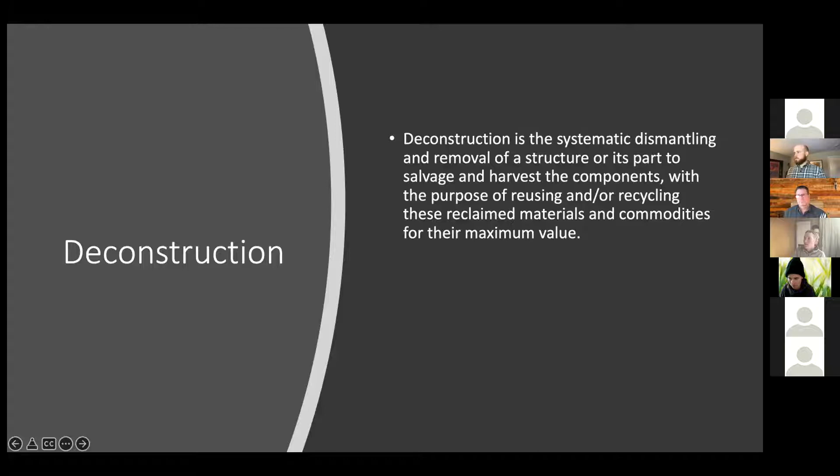Some building industry stats that I think are helpful to share: 50% of material resources taken from nature are building related. 40% of carbon dioxide emissions in the world are building related, and building stock is anticipated to double by 2060.

There are, of course, a lot of solutions being posed to help us build better, such as certifications like LEED or the Living Building Challenge. There's also the idea of designing for deconstruction, so that at the end of a building's life it can easily be taken apart and the materials salvaged for reuse. That involves things like not using as much glue everywhere. There's also talk around reduce and recycle, more specifically around decreasing waste at its source and increasing the lifespan of consumables, and a growing awareness around deconstruction.

There are different levels of deconstruction. There's selective deconstruction, where you cherry pick certain items to be salvaged in the house. It can be structural or non-structural. There's also partially mechanized, panelized, hybrid deconstruction.

This is a picture at one of our job sites where we salvaged over 45 trusses using a telescopic forklift. There's also panelized deconstruction, where you take off an entire wall or section of a building and disassemble it right there, or haul it to a warehouse and disassemble it there. If you're familiar with modular building, it's essentially the opposite of that.

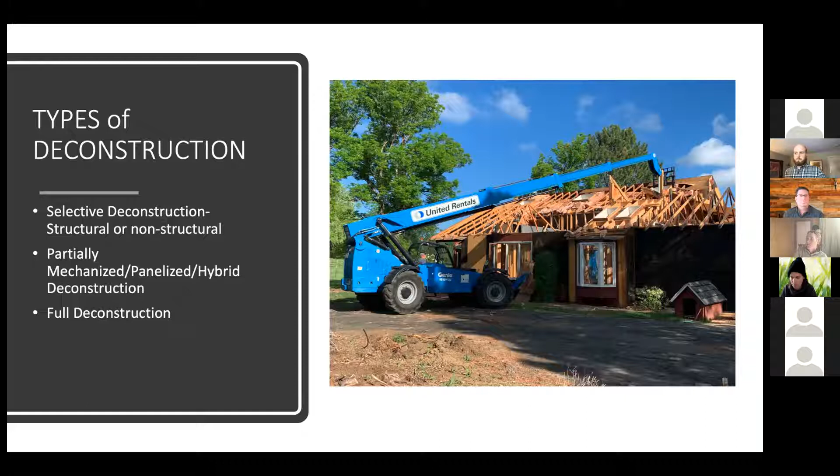Starting the deconstruction process, we always start with a job site walk. I'll walk the job with the contractor or homeowner, and at that point I'm understanding the scope of the job, what's going to get removed, and I'm taking a lot of pictures and creating a waste plan. Based on that waste plan, I'm able to figure out how much it's going to cost us to do the work. I send the bid to the contractor, and then we're hired to do the work.

What we do is more surgical and more careful than bulldozing or using a sledgehammer, so sometimes it can increase the cost of the service, not in every case, but sometimes. To help offset that additional cost, we donate the materials to nonprofits. We help connect the homeowner to an appraisal group so they can claim a charitable tax contribution and receive tax deductions. In this slide, I showed what the waste donation salvage list looks like that Resource Central does, a nonprofit in Boulder.

And they'll do this for free. Anyone in Boulder County, they'll go to your project and create a list of items that they will accept, then give it to the contractor or homeowner. I usually get it, and then our team knows what we can remove and salvage for the nonprofit.

I also, just for fun, included some pictures from a project we completed last week, an interior salvage job, with a lot of insulation, Trex decking, cabinets, etc.

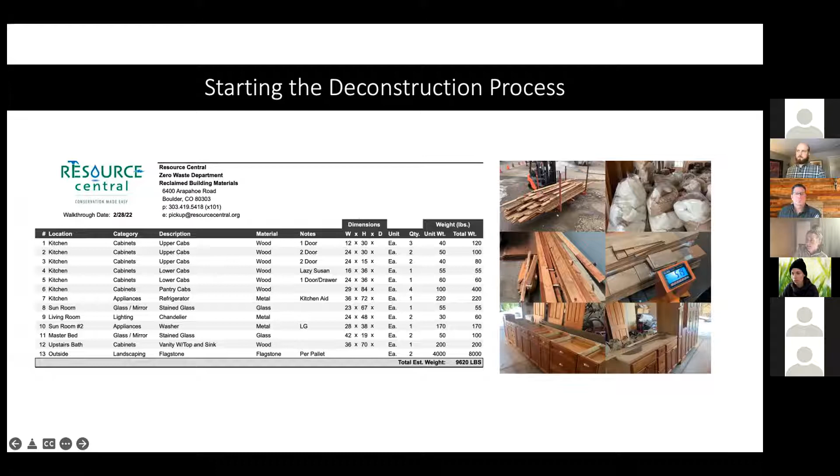So real quickly here, I'll go over a couple projects that we've done in the last year and a half or so to give you an idea of impact.

So this is a house that was built in the 1980s. It was 7,000 square feet. It took us 38 days with a team of 5 to fully disassemble the house. We diverted 125,000 pounds of material from the landfill, and 91,500 pounds of that material was wood. Overall, it was a 52% diversion rate.

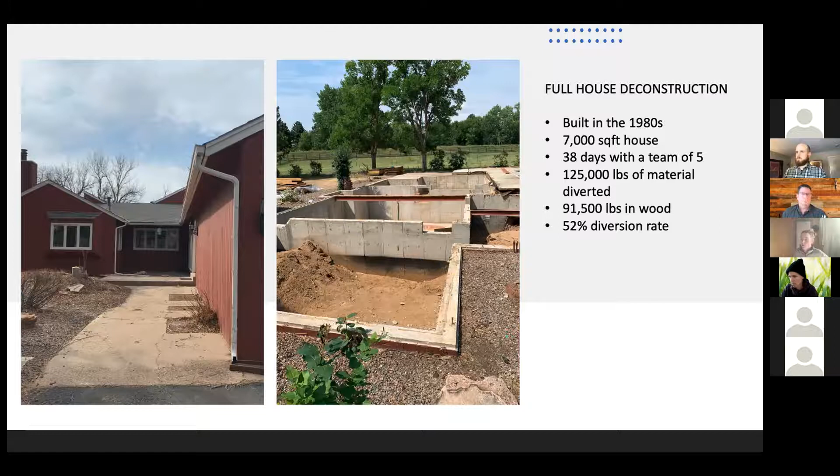We left the foundation. It'll get removed and recycled hopefully this summer, and that will increase the overall diversion rate. The homeowners were really interested in reusing materials on this job site. They were located down in Greenwood Village, so they weren't required to deconstruct, but they were driven by their own sustainable values, and were able to receive a tax deduction.

All the red cedar from their house, they built over 20 garden beds from. We removed a lot of lumber for them, denailed it and processed it, and left about 60% of it for them to reuse.

We also had a lot of insulation, windows, garage doors, structural I-beams, a lot of different material that came out. Because it was from the 1980s, there were some cabinets and vanities that couldn't get accepted by local nonprofits. So the biggest salvage value in this house would have been the lumber.

In the recap, homeowners paid about 3 times more for deconstruction. I estimated, after we took all the linear footage of all the lumber that we denailed and left them, that it was about a $40,000 value in lumber. And then they received tax deductions for this project, around $20,000. So combining those two benefits, they definitely saved some money in the long run.

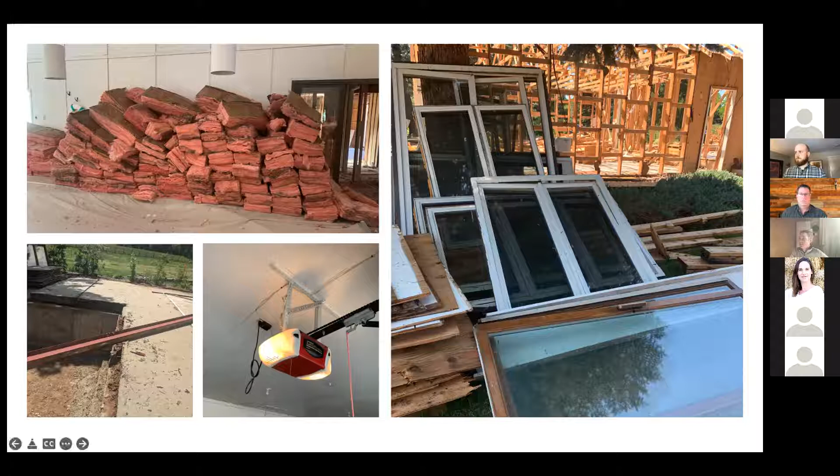Here's another project. Last one was 1980s. This is 1880s. This was in the city of Boulder. We were required to deconstruct it. It was a 2,300 square foot house. It took us 30 days to deconstruct this one.

We diverted 115,000 pounds of material from the landfill. Of that, 18,000 pounds of it was wood. And overall, it was a 78% diversion rate.

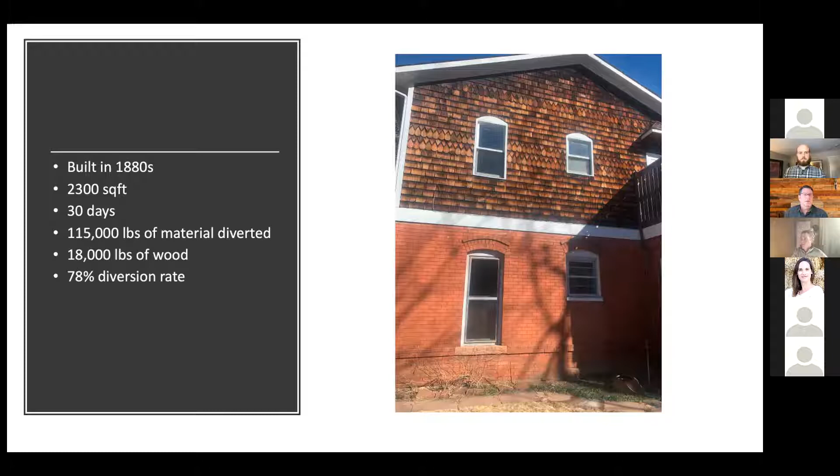We got a lot of great old growth wood from the 1880s out of that one, and bagged up a lot of bad insulation. We also palletized a lot of the brick the homeowners wanted to reuse for their new construction project. The brick they didn't want, we took to have it used as backfill for another project.

Our costs for this project were 4 times more than a traditional demo company. The homeowner will likely get around a $20,000 to $30,000 tax deduction, which makes it about a break-even financial scenario for them. Last one is an interior remodel project.

Unfortunately, there are quite a few homes out there that get remodeled to be sold, and the new homeowner doesn't like any of the new finishes that they just bought for the house. So they ask for it to all be gutted.

So in this case, we were hired to remove doors, cabinetry, demo the bathrooms, remove the flooring. We took about 10 days with a team of 4 people, and all the materials that we donated out of that were appraised at over $100,000, equating to about a $35,000 tax deduction for the homeowner.

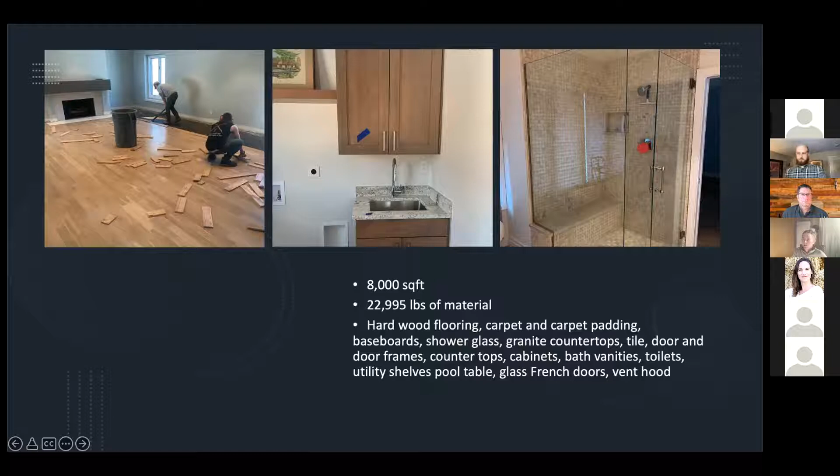And our cost to deconstruct was a lot less, so the homeowner made money in that case. In those 10 days, we saved about 23,000 pounds of material from the landfill. And I'm proud to report, since I started the company, we've diverted over 1 million pounds of material from the landfill.

There's, of course, a lot of challenges of what we do. Unfortunately, there's just not enough end markets for a lot of materials like drywall, asphalt shingles, painted wood, wood with glue. Also, building codes need to allow for reclaimed lumber to be more widely used. It's allowed as long as a structural engineer puts a stamp on it, but structural engineers don't want to take that risk, even though the lumber is much stronger, more resistant to decay.

I'll let Shawn Wood share more about Oregon and Washington and what they've done around creating building codes to allow for reuse. But another challenge is just the industry generally lacks serious investment in reuse culture, from end markets to contractors to consumer behavior. And then there's just a lack of awareness. Most people are genuinely surprised that we can donate and recover the materials that we do.

And we just finished a project yesterday, and the homeowner came home and looked at the flooring that we denailed and saved.

He's like, 'Oh my God, you guys are crazy. I can't believe you can save this stuff.' And that is 95% of the people that we work with. They're just really surprised by the material that we can save.

We have a lot of great nonprofit partners for donation. Bud's Warehouse and Resource Central will actually send out a box truck to collect material from our job sites, and they'll haul it to be donated.

There's also several markets for recycling material. All metals are easy to recycle. Dimensional lumber that's not painted or treated, we can either donate, or we can send it to be chipped up and used as mulch — they'll run a magnet over it and pull the nails out. Any brick or concrete can be sent to the recycler and used as road aggregate.

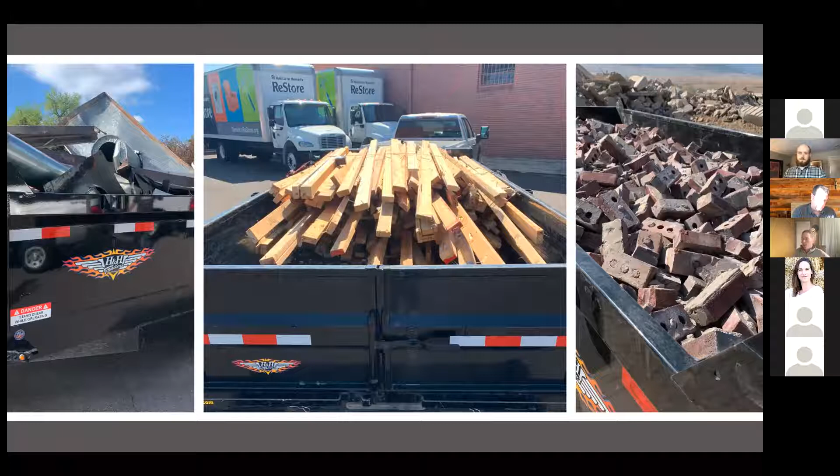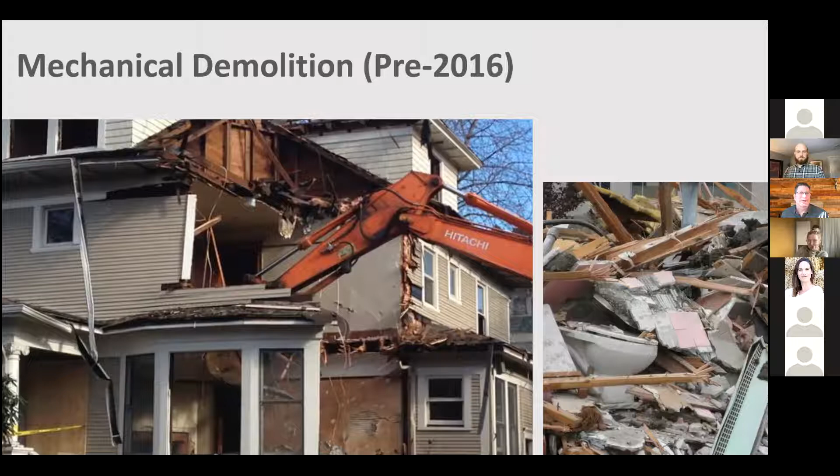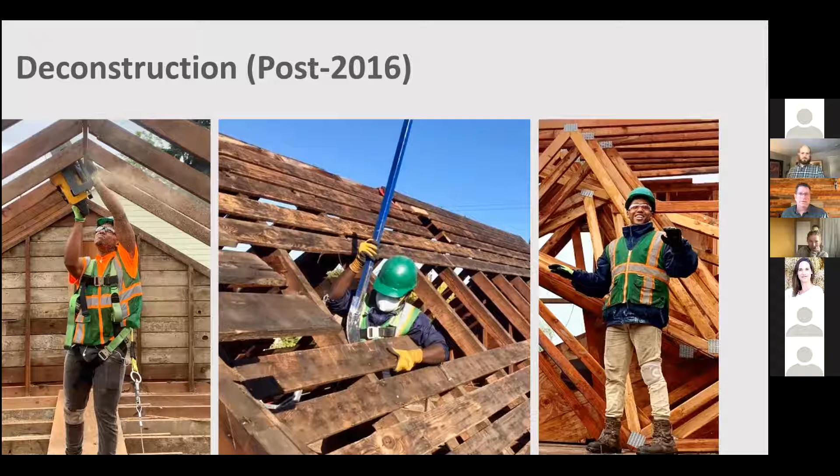I've been using this image in my slideshow for 6 years, so it has turned into kind of the poster child. After 2016, the predominant way for taking down houses in Portland is deconstruction, and I'll explain why in a moment. So we've fundamentally changed how houses come down in Portland, and it really kicked off for us around 2013, 2014.

5+ years ago, you could get a demolition permit over the counter, same day, and that afternoon you could be tearing it down. So a neighbor could literally go to work and come home, and the house next door was gone, and there was a pile of dust everywhere.

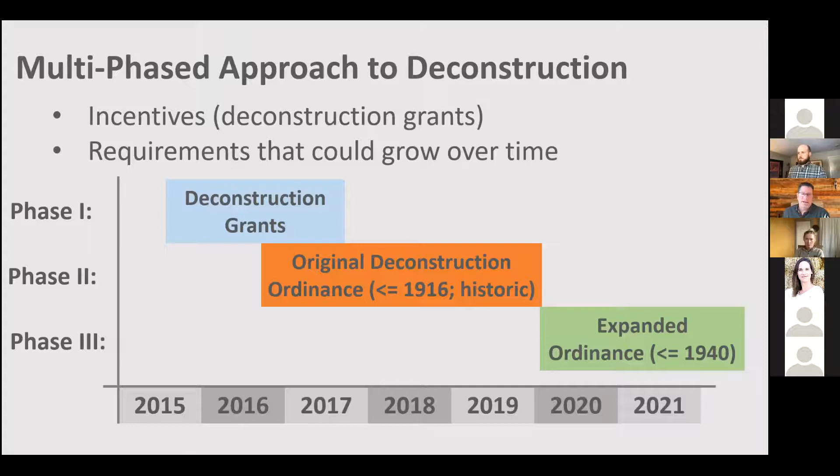This was kind of just an overview of the grant program. We had little grants, like $2,500 to $3,000, that we gave out for deconstruction projects. And probably the biggest advantage was we were kind of paying money for information.

So we're encouraging deconstruction, we're helping it along, but we were able to gain a fair amount of information so that when we went back to city council to make the argument for requiring deconstruction, we had information on how much it cost, how much it cost compared to mechanical demolition, how many labor hours went into the project. And then it also was a proving ground for elements that ultimately ended up in our deconstruction ordinance.

So like the signage, turning in receipts for materials at the end, all of those were components of the grant program that ultimately ended up in our deconstruction ordinance. And so again, initially 1916 or older was the threshold for required deconstruction. We expanded that in 2020 to 1940.

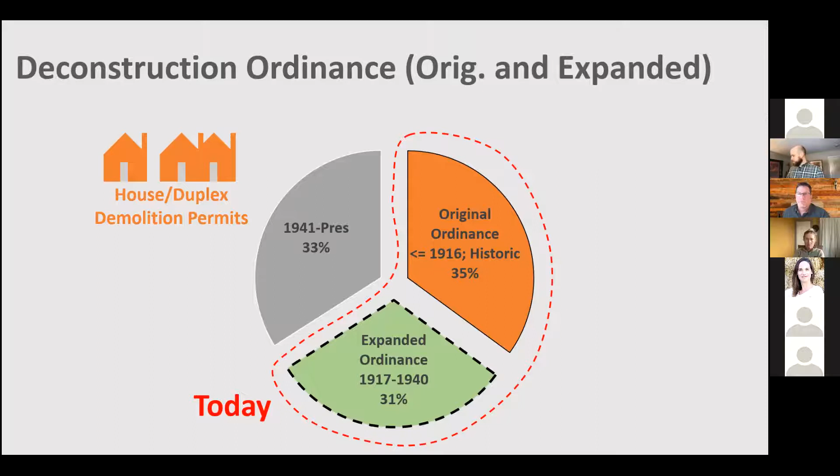So that original 1916 threshold captured about a third of all house demo permits in Portland. And then taking it to 1940 captures essentially another third. So today we capture two-thirds of house demo permits in Portland.

And likely the reason for that is folks turned in their demo permit applications before the ordinance went into effect, to kind of beat the clock and be vested in the old code. So we see a little bit of trickery there. So we don't quite reach the full third.

When I look at those numbers, a third of the projects were required deconstructions. That remaining 8% were voluntary projects. So that means those developers did not have to do deconstruction. They chose to do it. And I can guarantee you that the reason was the cost was competitive.

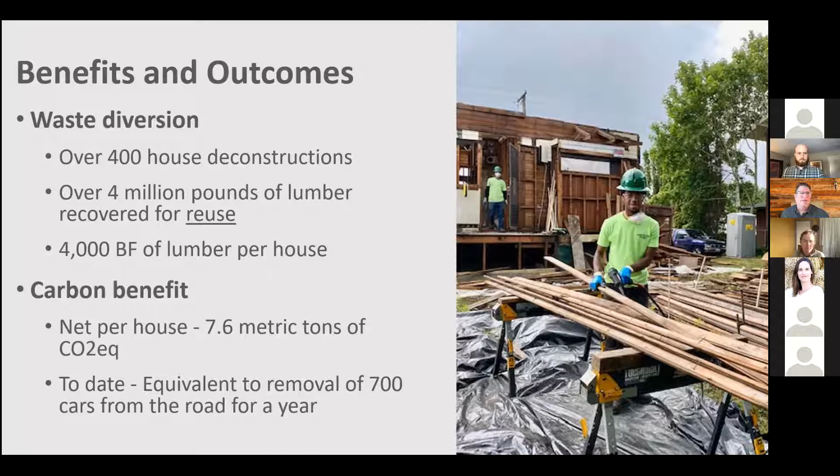There's hazardous material benefits with deconstruction. It produces a lot less dust. It's more surgical. It's very frequent that deconstruction contractors find unabated asbestos in the walls or under cabinets, even though an asbestos survey and abatement has occurred. Work stops, the material is safely removed, and then work begins again.

The deconstruction ordinance - this could be a whole other topic - but because of its best-practice approach to hazardous materials, the city of Portland ended up adopting additional requirements for mechanical demolition. So you can no longer just show up with an excavator and smash a house. You have to hand-remove all the exterior painted siding, windows, doors - anything non-structural and painted pre-1978 has to be removed by hand. And then there are wetting requirements.

That added a fair amount of additional labor for mechanical demo permits. That kicked off in July 2018, and that's where we start to see an increase in the cost of mechanical demolition. Meanwhile, because of competition and innovation, we're seeing lower costs for deconstruction.

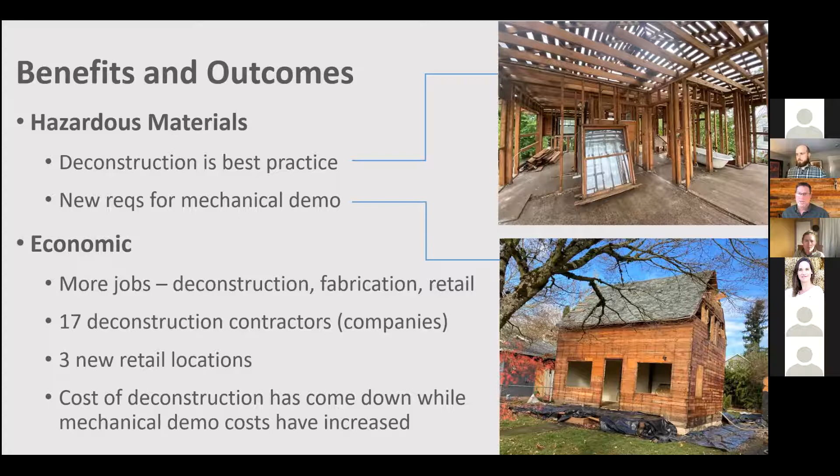There's economic benefits - more people working on these jobs: deconstruction contractors, fabricators, retailers. We've got 17 certified deconstruction contractors now in Portland. And like I said, the cost has come down for deconstruction while mechanical has gone up.

We're also doing things to try and support the demand side for salvage materials. We've got a new zoning code incentive - essentially a point-based system where you get a couple of points for using salvaged wood. Anna alluded to this earlier - both Oregon and Washington have amended our building codes to allow for ungraded, unstamped, used lumber for structural purposes in new construction. So it just assumes a minimum grade in the absence of any grade stamp.